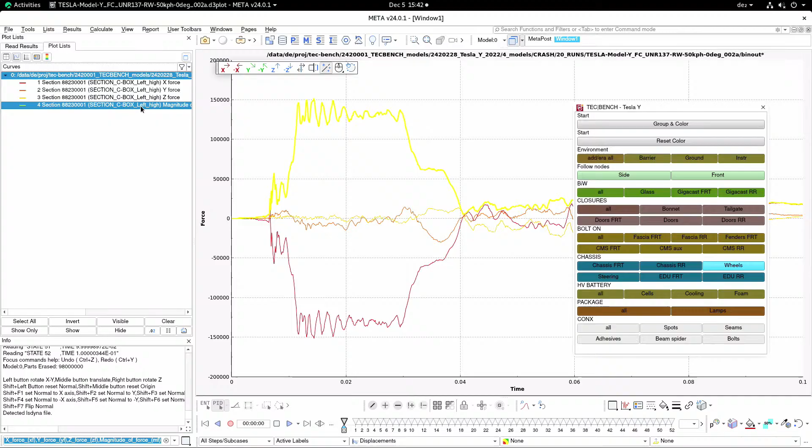Good morning and good evening, everybody. Welcome to this webinar on digital tool for crash, turn competitor insight into cutting-edge crashworthiness. I have the pleasure to be here with Valentin Zaccardo, Product Manager, Digital Twin Solution, Mark Gevers, Business Development Director in Tecosim, and Thilo Vollberg, Team Manager in Tecosim. Wait, can I stop you one second? It's not recorded. My name is Filippo Bona, Product Marketing Manager in A2Mac1. Sorry, I'm totally tied up. Let me repeat what I was saying. Can we start again from the very beginning? Of course, give me one second.

Good morning and good evening, everybody. Welcome to this webinar, Digital Tool for Crash, turn competitor insight into cutting-edge crashworthiness. My name is Filippo Bona, I'm a Product Marketing Manager in A2Mac1, and I have the pleasure to be here with Valentin Zaccardo, Product Manager, Digital Solution, and Mark Gevers, Business Development Director in Tecosim, and Thilo Vollberg, Team Manager in Tecosim.

Let's go straight to our agenda. We will have first a short corporate presentation and portfolio presentation made by Valentin and Mark. Then we will deep dive into the Tesla Model Y. We will analyze the Body in White teardown and give some information about technology insight. Then we will have a performance insight with the CAE model, and we'll talk about digital twin for crash and NVH digital twin. Finally, we will have a 15 minute Q&A session.

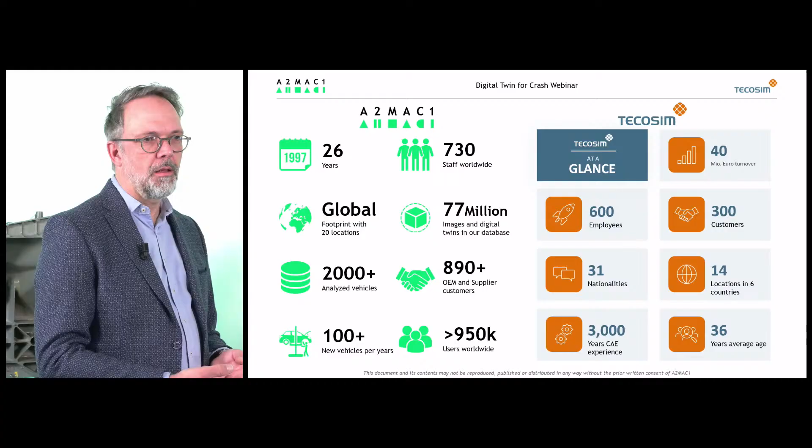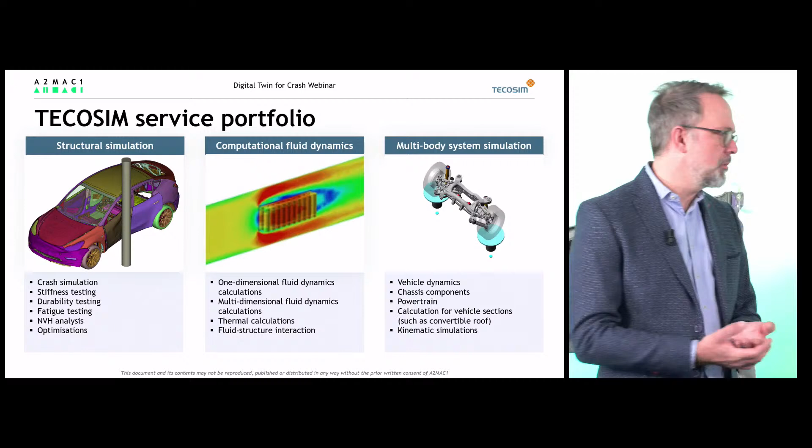Within Tecosim, we are specialized in CAE, in simulations, and we do not only crash and NVH - that's a part of structural simulations - we also do durability and fatigue, whatever you can do with the finite element method. But we also do computational fluid dynamics, so you can see here a thermal simulation of a battery pack. We do multi-body systems, for example vehicle dynamics. We do electromagnetics, from e-machines to sensors and so on. We do system simulation, combining different domains, and we do process automation.

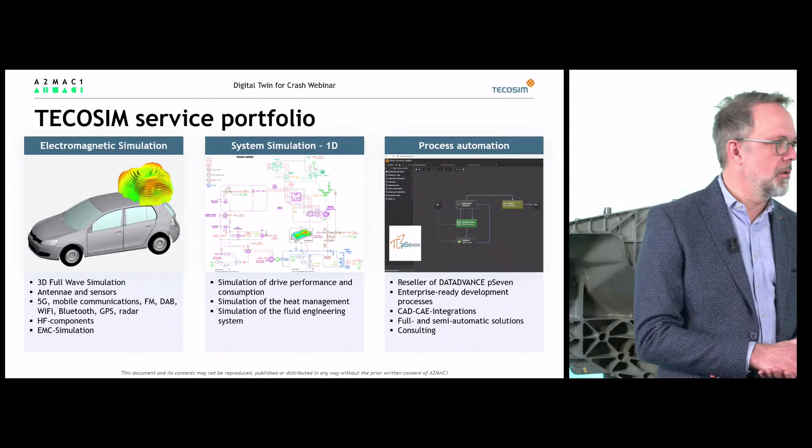On our side, at A2Mac1, as many of you may know, we are experts in benchmarking, and moreover in technology insights. This has been the core activity of A2Mac1 for 26 years, doing teardown and static benchmarking of cars. But we have also grown our activity in recent years into 7 important automotive pillars, such as sustainability, providing life cycle analysis and assessment of cars on the market, cost insight assessments thanks to a full breakdown costing approach, market, supply chain, and software and IT services insight as well.

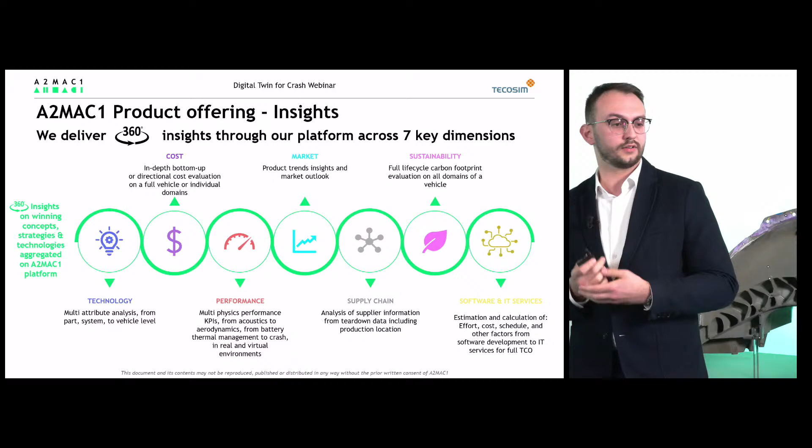And for the topic of today, with Digital Twin, we are assessing the performance and dynamic behavior of vehicles, so multi-physics, but also on physical tests, and energy management strategy to assess the thermal efficiency of the latest BEVs on the market.

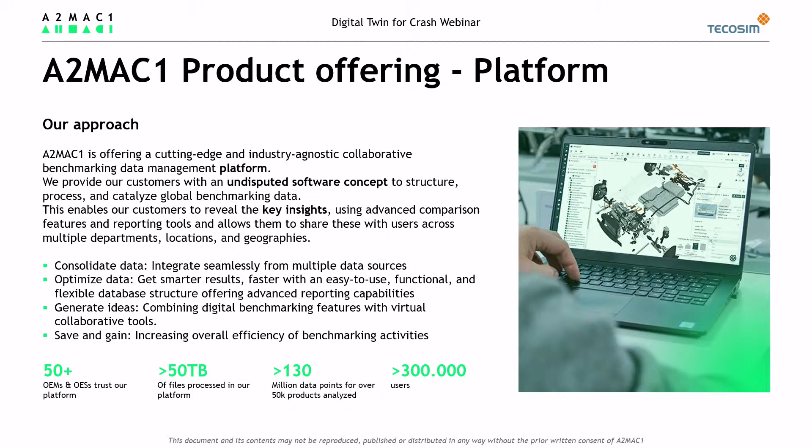And what is very important is that all the data A2Mac1 gathers across the current automotive world is uploaded into an accessible and user-friendly database. You just have to log in with your own account and you can save time, generate ideas also with very intuitive 3D tools. You can also cost and assess the price of your competitor's vehicle right from the platform. This is definitely your one-stop shop if you want to benchmark your competitor.

And on the basis of this, A2Mac1 is doing scanning and material analysis and also scans the connections. That is all the input you need to build simulation models to deeply understand your competitor. And you can do it not only for crash and NVH.

You can do pedestrian protection with it. You can do electromagnetic compatibility with it. A2Mac1 is also delivering aerodynamics on top of this data. You can really analyze your competitor instead of measuring it.

And this all from the comfort of your computer, because you don't need anymore to rent or do expensive physical testing. So that's really also a cost and CO2 effective solution doing virtual benchmarking.

Please look at the camera at the maximum. Don't look too much at each other, both of you, because you can do it sometimes, but not all the time. You really need to focus on the camera. Okay. Focus on the camera. Okay. Thank you. Thanks for the hint. Okay. Yeah. So sometimes when he's telling something, I will step in. Yeah, okay. Okay. Understood.

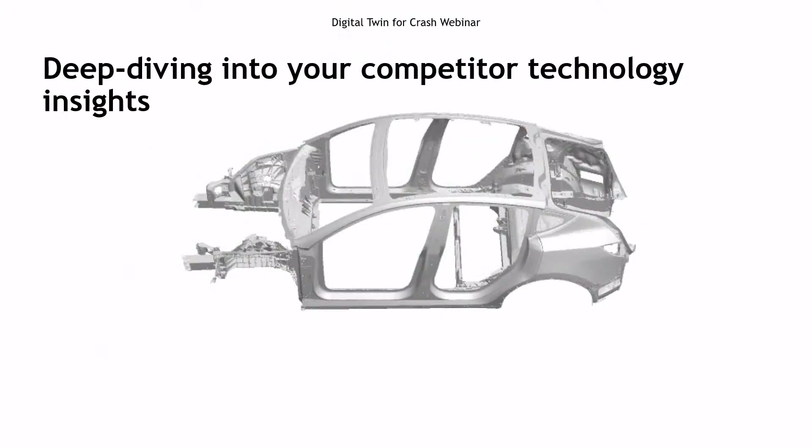And on this vehicle, which is also the most sold BEV vehicle in the world today, we have discovered never-seen solutions. As you can see on the body in white, there is no floor, there is no cross reinforcement, there are no seat attachment points. And you can immediately identify those 2 giga-casted units that we have brought here on our set today, the front and the rear unit.

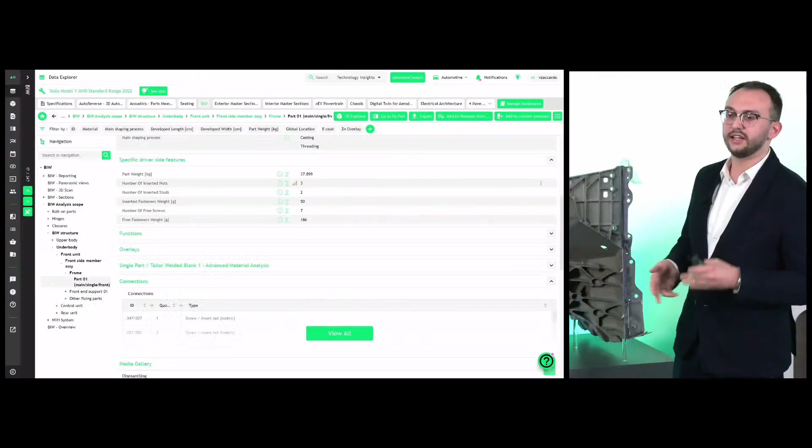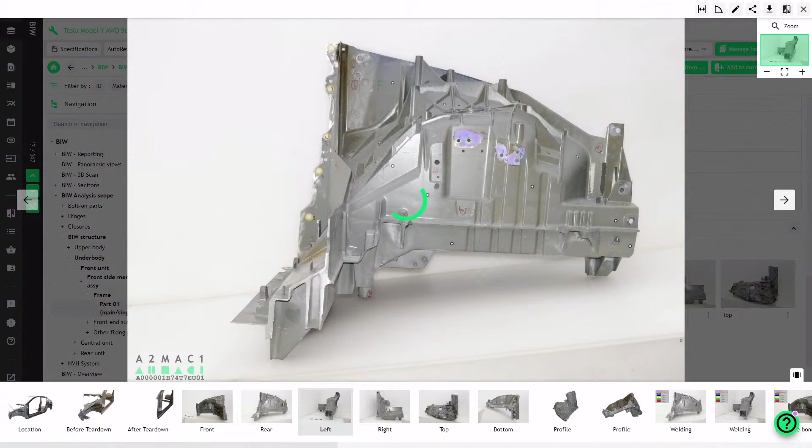And jumping into this very special part, you have the information about the weight, number of fasteners, so the cost drivers. You have the reporting of every connection with the different parts of the car body. Standard view of pictures, front, left, back. And also for all the connections, all the eventual weld spots or welding lines, we are reporting them visually in the platform. And we are not only reporting them, but also monitoring them thanks to an assembly tree.

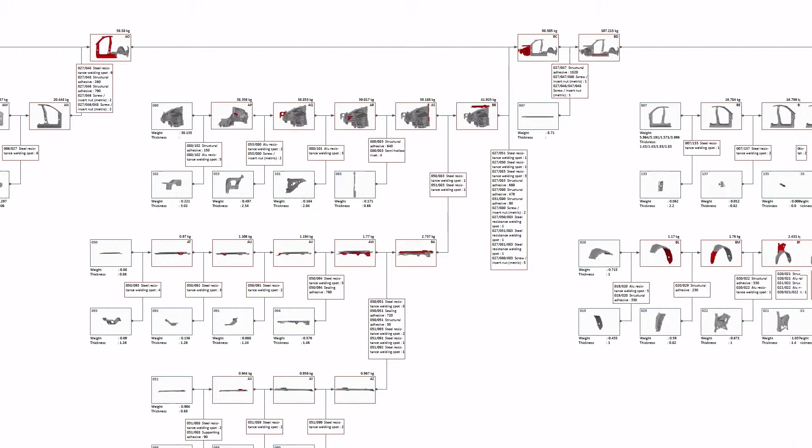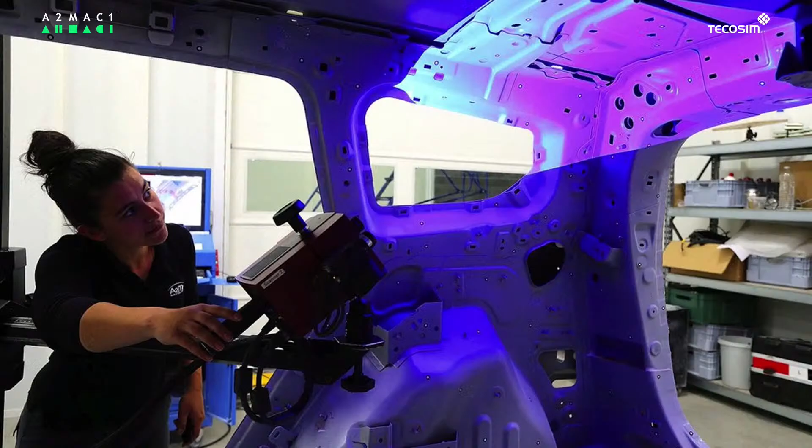So basically it's a big tree with leaves and branches. Every leaf of the tree is a single part and every branch is a sub-assembly. So you can really accurately monitor every connection between all parts and benchmark the body assembly strategies against market peers.

This is not all we do. On top, we also do scanning. This is a process we introduced last year. It is optical scanning, and here again, let's do an example in the A2MAC1 platform, in the 3D Explorer. We will cross-compare 2 cars, 2 EVs, the Tesla Model Y with the Giga casting solution, and the more conventional metal sheet assembly design.

And last but not least, for every part of the vehicle, we also do material analysis. And for this Tesla Model Y, we have been a bit deeper than our usual process, because we wanted to assess what is the ultimate tensile strength of this part. In case of main crashes, for instance, this is a very good mechanical KPI. So we have cut dedicated coupon samples, machined them, and performed a tensile strength testing.

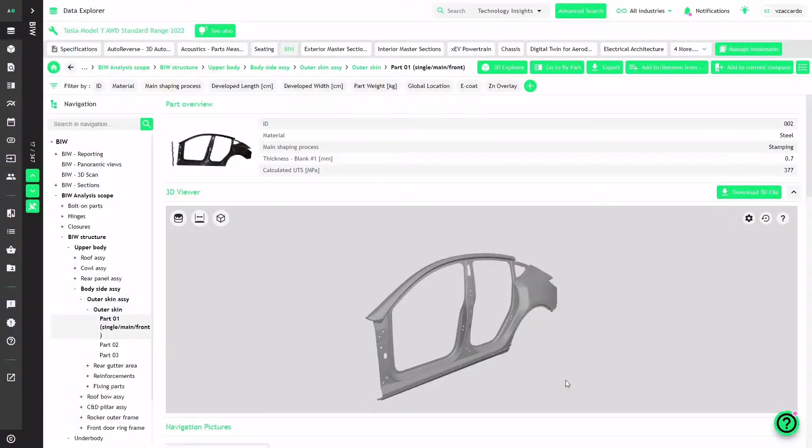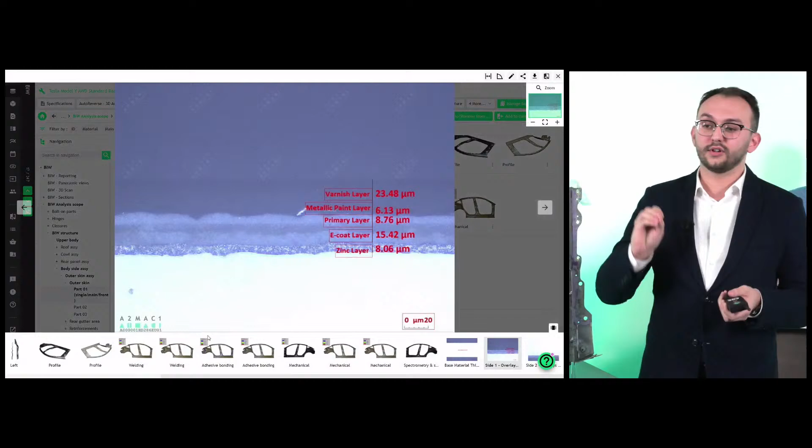But also on our standard process, what we do, I will show you on the platform right now. If we take, for instance, an external part, an outer skin, this is the body side. We always do surface hardness testing, core hardness testing. So you have this information reported in a database. Also the chemical composition. This is a very valuable data for raw material providers. And we assess, we measure, thanks to microscope analysis, the different layers of coatings, for instance.

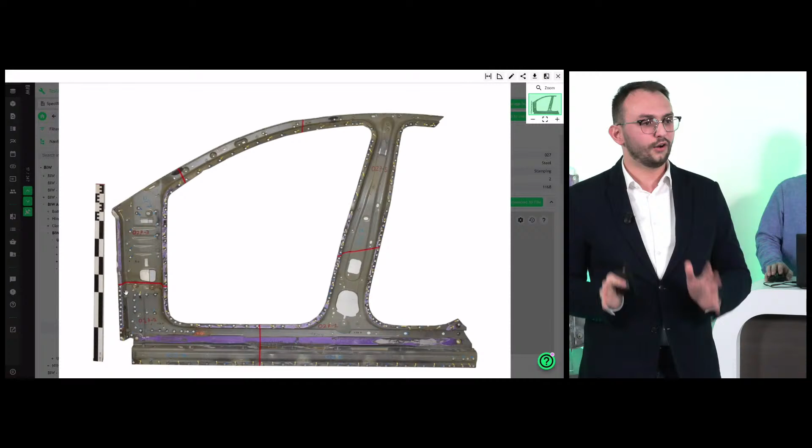And again, what is very important is that every analysis that A2MAC1 is doing is done on a standard basis. So you can cross-compare this data among all other vehicles we have benchmarked up to date and on every market in the platform.

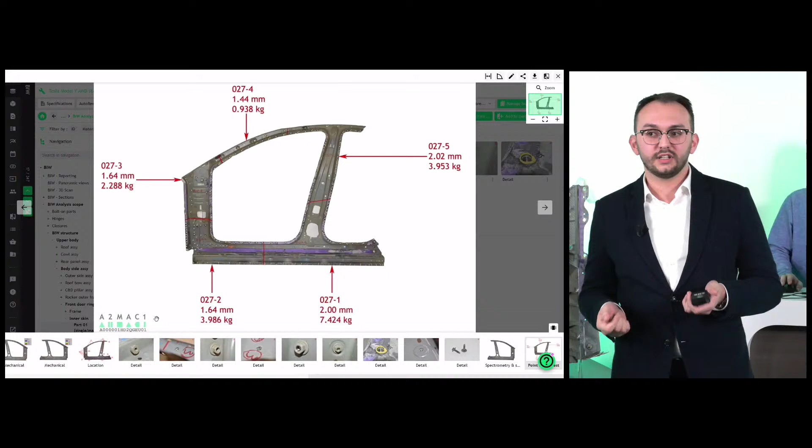Another interesting insight on this vehicle. As you can see, the inner structure of the body side is a tailor welded blank. And even here, we do not measure the core hardness only on one blank. We do the 5 blanks, so to identify the different grades of steel. And we measure the different thicknesses, because this is a tailor welded blank, one stamp, but many grades of steel, many thicknesses on the same part. So every information, all the technology insights about your own body in white or the one of your competitor is really uploaded on a standard basis in the platform.

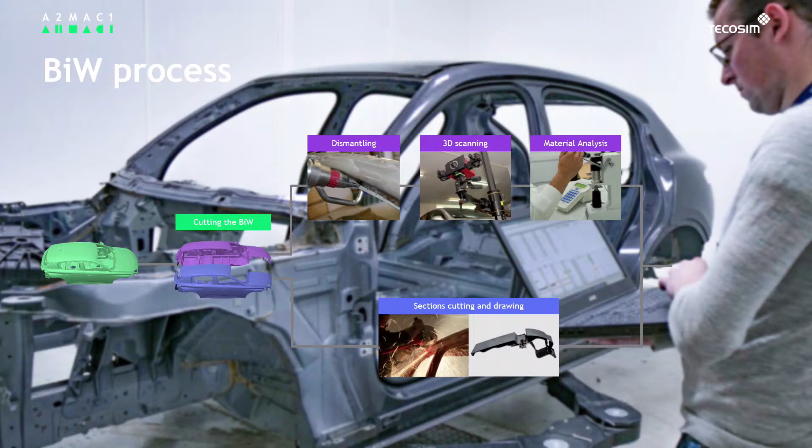So just to summarize, we cut the body in white, and we dismantle, we do 3D scanning, material analysis, and on the passenger side, we do not keep it alone. We also cut cross-sections. We reference them in the database to identify the addition of external features and functionalities. And we do this also on the main cross-sections that contribute to the load path of the body in a crash event. So this is also stored in the database.

Thank you. And now, speaking about cross-section and energy load path, what about? Yeah, let's continue. Valentin already mentioned that we have done NVH tests on this vehicle, where we have both parts in. We have done, of course, then a CAE model based on the 3D data, the material data, the connection data. We build up a body model, and then we do a correlation of this body NVH model against the NVH tests. And we have done it with the battery connected, and we have done the same without the battery connected.

And we found the first surprise. The first surprise was that the frequency of the torsional mode, that's the main mode of the body, is the same with and without the battery. And I was wondering, I'm a crash guy, I'm not so deep in the NVH area, but a colleague of mine explained it to me, and there is a reason behind it. And with the help of the model, you can answer this question: why did they do that? The digital twin, in this case for NVH, can give the answer. And the digital twin for crash can give other answers.

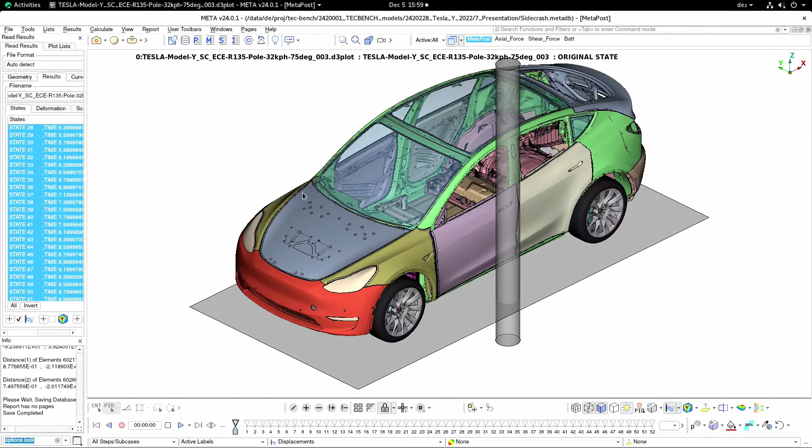And with this statement, I will hand over to Thilo, my colleague, and Thilo will show us crash results of this very special vehicle. Hello, I'm Thilo Fröberg. I'm with TECOSIM for 13 years, and I'm a team lead in occupant, pedestrian, and every kind of safety which is human regarded. So what we see here is basically the crash model, which was derived out of the data which has been shown by Valentin. So after the scanning process, we basically get a set of data which we then convert into a CAE model.

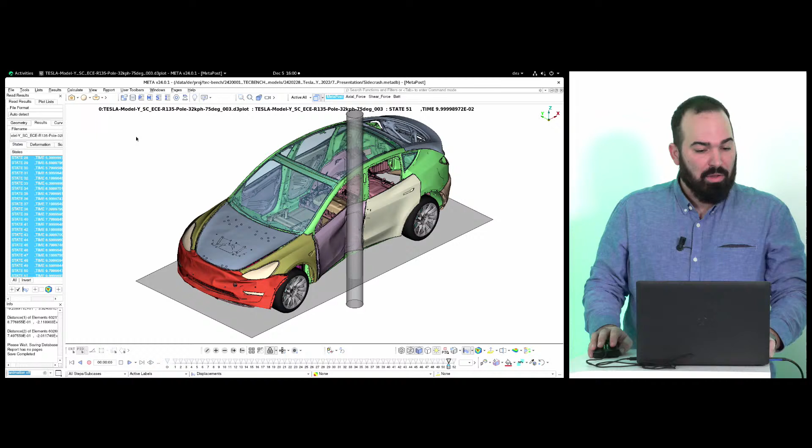So right now, this is, for example, a side pole crash. I will just play it for you. So this is a normal crash load case, which is performed to bring the car to the street. And basically, what we can do now with this simulation, we can not only look from the outside, we can look from the inside. So, for example, I can now look into the area of the impact.

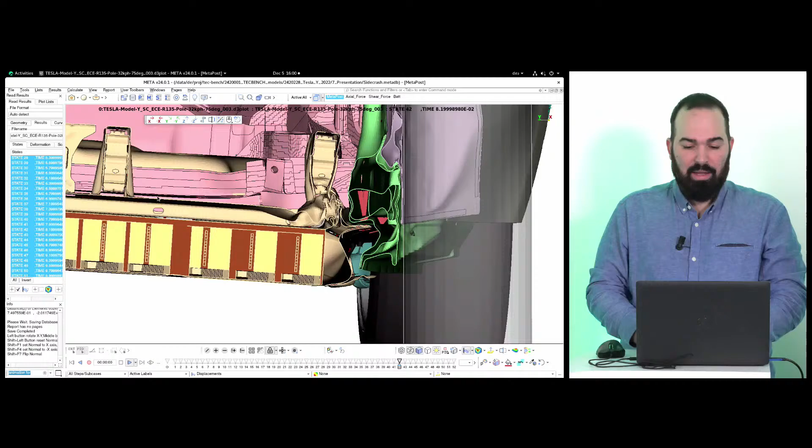And we can investigate if, for example, the battery casing is touching the battery cells. As you can see here, the sill area and all the structure prevents a contact between the battery cell and the casing.

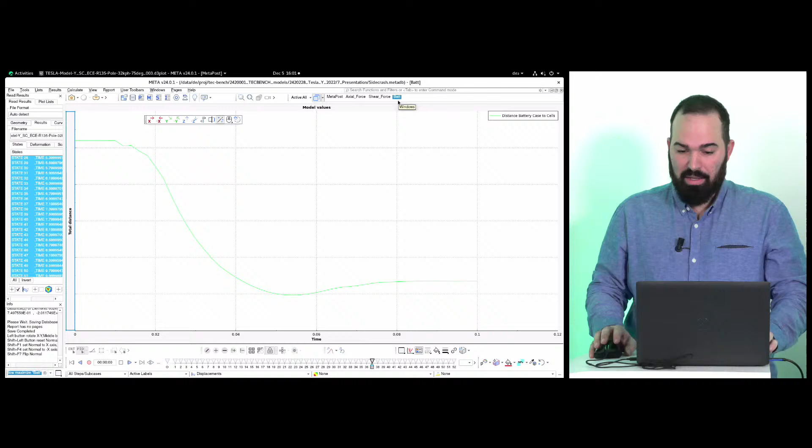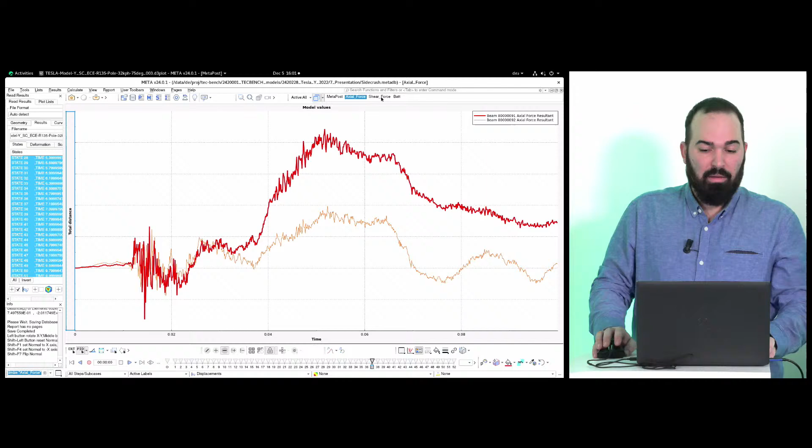Furthermore, we could investigate how the battery casing is moving in relative proportion to the body. So for example, here you can see it is breaking away. We can then also look at force levels of screw connections, or look at bolts, look at weld lines, welds, and see if they fail, if they are stable, and we can analyze the structural behavior of the car.

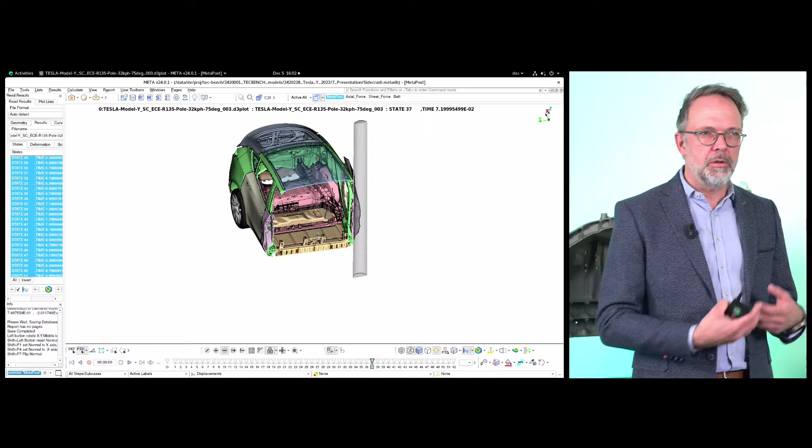So that's the topic. It is analyzing instead of measuring. That's really important. You can analyze your competitor as deep as you analyze your own product with your own simulation models. That's the same approach. No one is doing the development with prototypes anymore. There are less prototypes. There are prototypes, but less. And everything is done on simulation base. And in the benchmarking, we give you the same power.

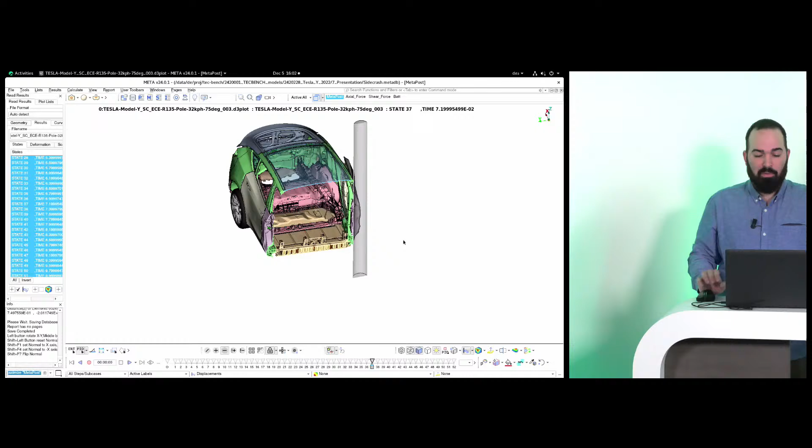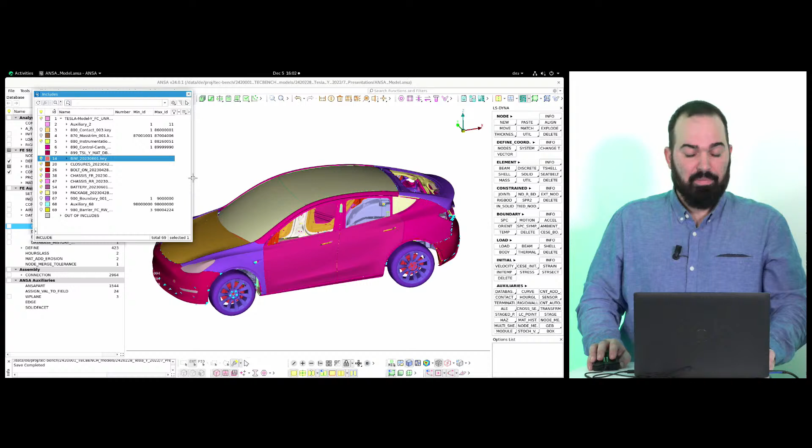So to perform all of this, a certain set of tasks has to be performed. So let's have a look at the model. So here you can see the simulation model of the Tesla Model Y. It contains roughly 11 million elements and is divided and built up like a normal OEM model would be. This means, first of all, the car is divided into several packages, like the body in white, which contains the castings, as you can see, and the structural parts of the body.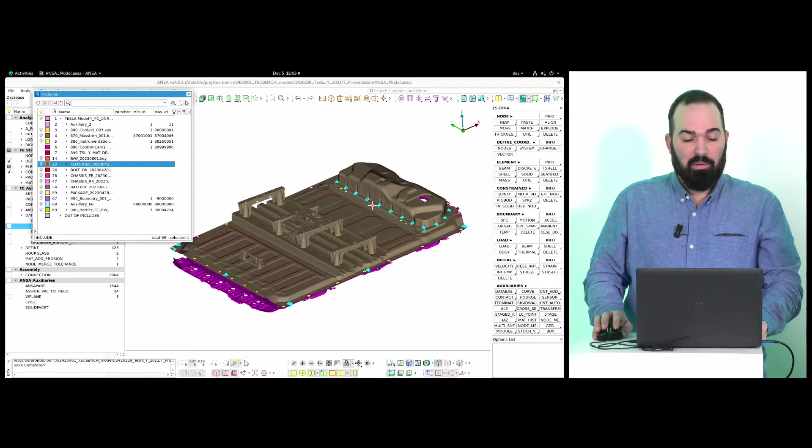Then part of this body in white is the battery casing. And of course, we have all the closures and bolt-on parts available. Everything is connected state-of-the-art for the automotive industry. And to create a model which we can analyze in crash, there has to be a certain quality attached to it. So let's have a deep dive into the quality.

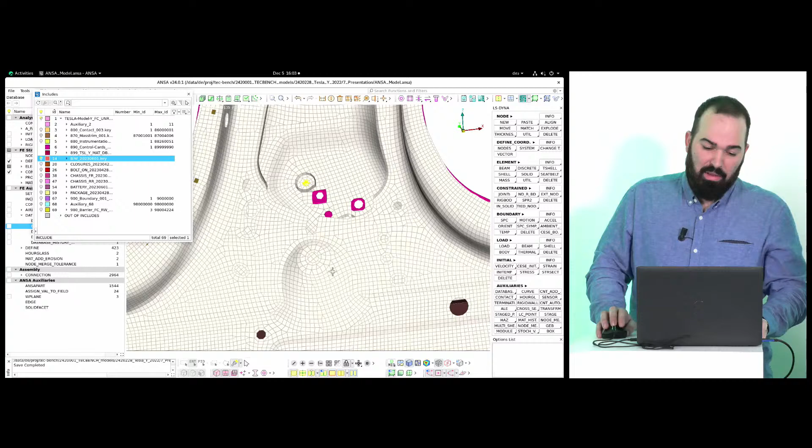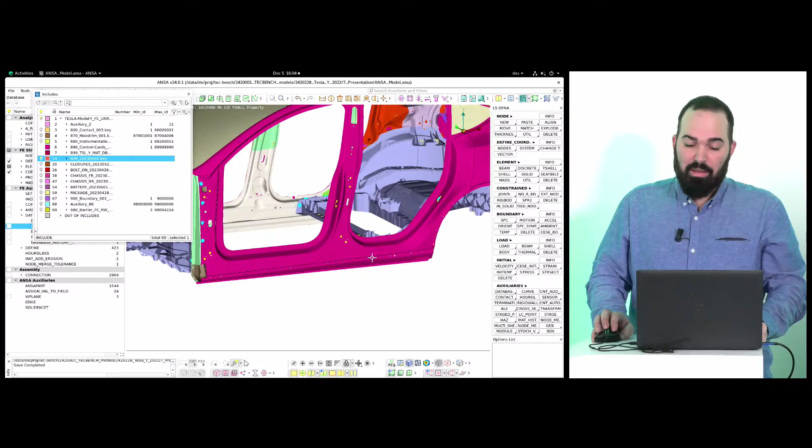So here we can basically see our mesh quality up close. So to let you know, after the scanning process, we have a randomized set of points in the cloud. This will not represent any CAD data. So there is a specialized process which we perform to regenerate real mesh data representing a CAD-based quality, let's say it like this. So this means our data is not only looking good and every edge is defined. On top of that, our data is penetration-free.

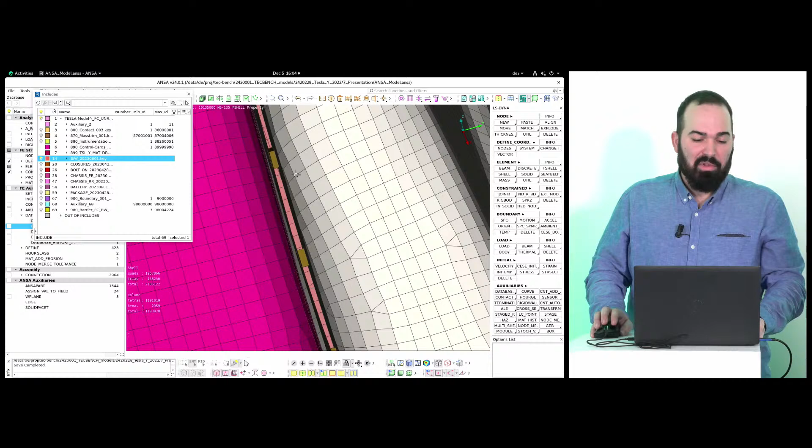What does this mean? Let's zoom into this area, for example. Here we can see the flange area, where the outer and inner sheet metals are matching. And in between, we can see the spot welds. As you can see, all the data is perfectly aligned. We have no intersections and no penetrations. And this needs to be like that, because otherwise we will not be able to perform the crash analysis and to connect everything properly.

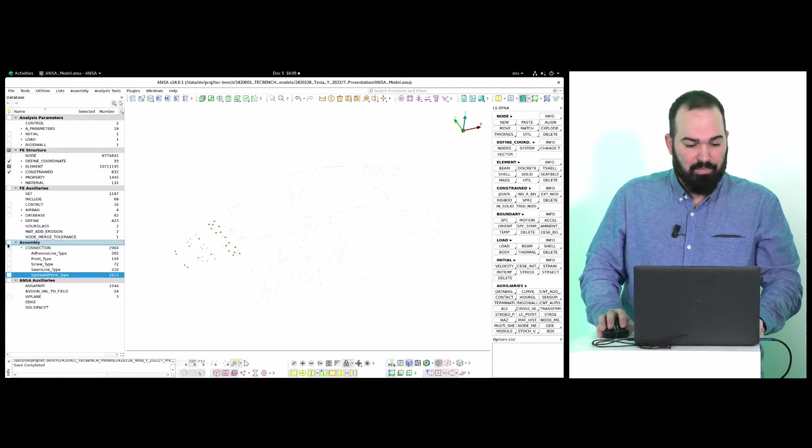Coming to the connections. So this model consists of a lot of connections, and all of those are manageable, also by yourself. So we have nearly 3,000 connections in this vehicle, and from these connections, 2,000 are spot welds. We can see them here. This is every spot weld that has been registered in the A2Mac1 disassembly process. Each of the spot welds is assured to be perfectly located and to have every connection partner as it was recorded. On top of this, we have seam welds, we have screws, rivets, and adhesives.

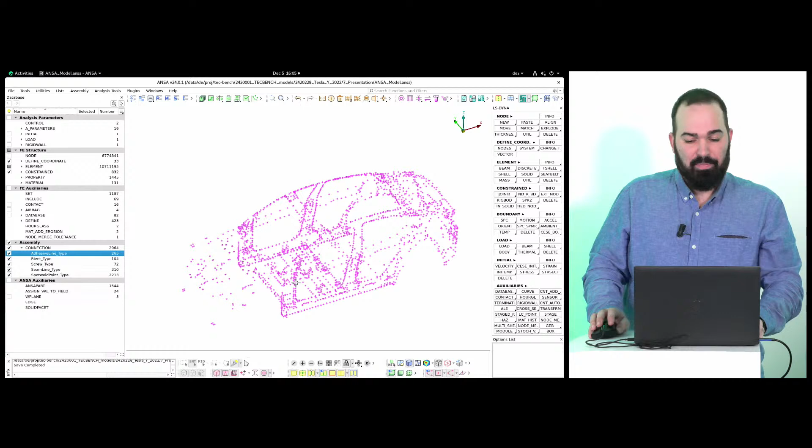All of this is in an ANSA connection file, which means you can manipulate it, you can change it, you can even exchange the description with your standards. So, going to the next stage. Valentin was talking about materials. Let me get everything back on. So, let's have a look at the materials.

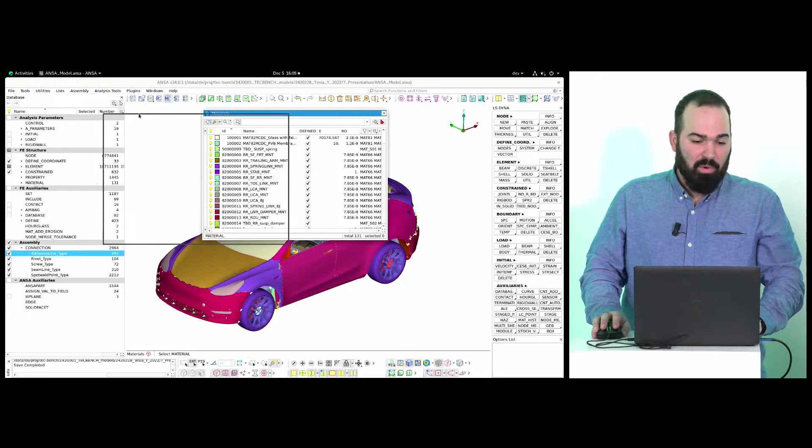We have attached a large material library, completely open for you. Everything is accessible, which is divided into main regions like materials for bushings. Also bushings are defined in the chassis. And we have steel materials, which are called ST, aluminium materials, AL, and plastics. So let's have a look at the steels. Steels are divided into different grades, like dual phase, hot rolled steel, boron, or normal steel, cold rolled.

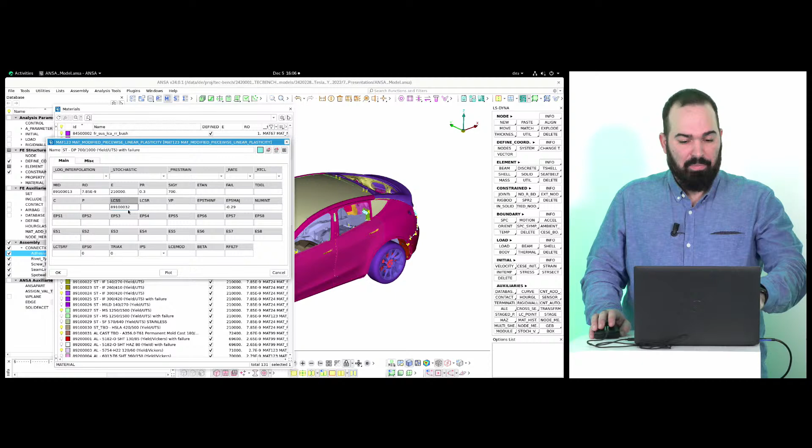So let's look into one of those materials. Our material cards are not just linear elastic material cards. They contain failure and they contain strain rate dependent data as well. So again, state of the art for crash development.

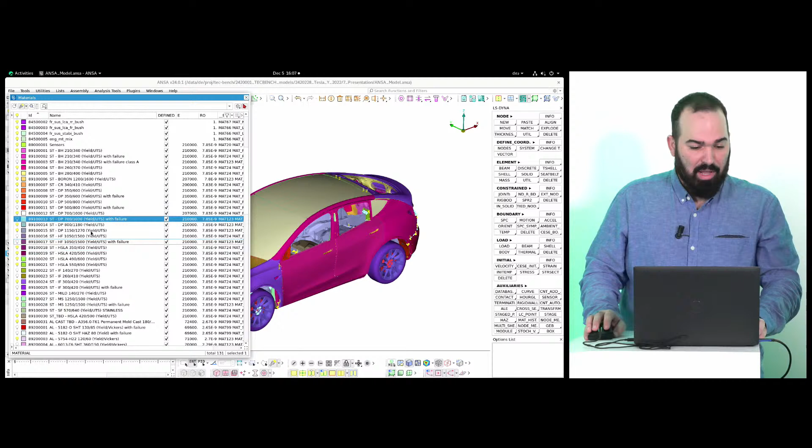All the materials which have been recorded from core hardness testing from A2Mac1 have then been reapplied here in the model. So for example, if we look into some of the high-grade materials here, let's take some of the dual-phase steels, and maybe let's take the boron. We can see areas where high-grade steels have been applied. Yeah.

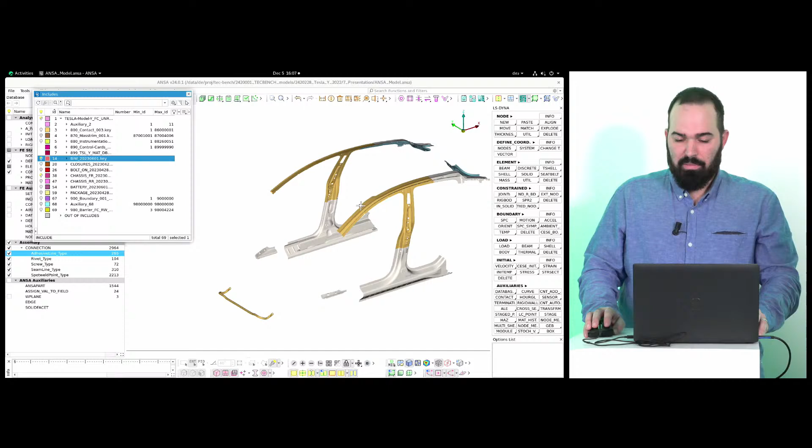Also, Valentin was talking about one specific part I would like to show you. So inside of the B-pillar, we know there is a tailor welded blank. And this also has been replicated inside of our models. So we take care that all the necessary